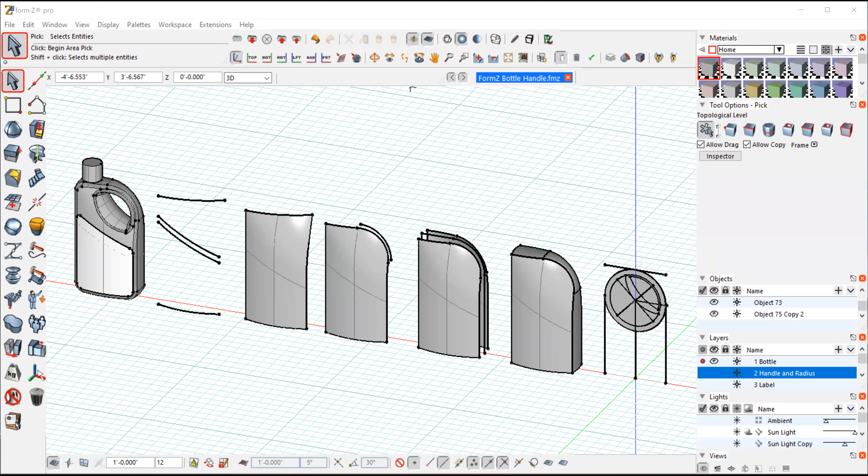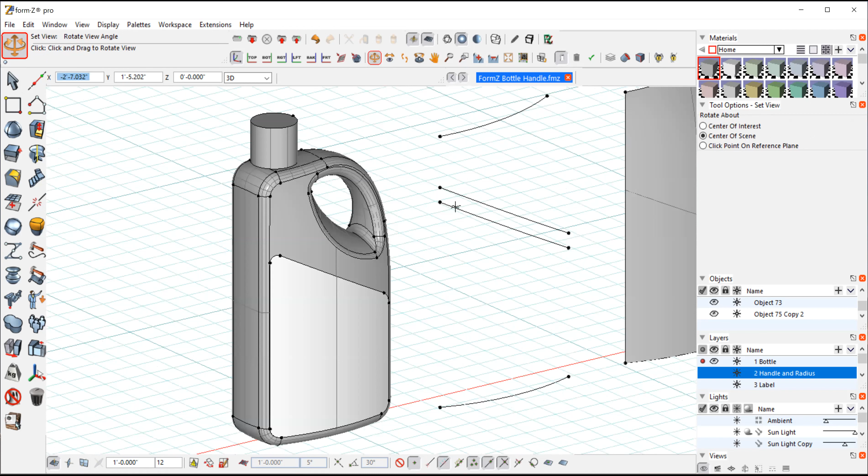It's pretty straightforward, I'm not doing anything unusual design-wise. Just has a radius corner, and we have the handle up at the top, sort of oriented on a 45 degree. Then the rest of the bottle is pretty straightforward. I have my nice soft edges so we can get out of the mold. I have a ruled surface that I'm integrating as I'm building this bottle, so there's the label area for that ruled surface. And I'm not doing anything with the closure, just putting something there as a placeholder.

Okay, so when doing something like this, where we're trying to design the bottle shape to accommodate the handle, we just need to keep track of certain things, like the thickness and the width of the handle, because I'm not going to build the handle separately and then add it to the bottle, I'm going to integrate it. So it's very critical that I start to think about the proportions and the size of that handle as I'm building this. So I'm starting off with lofting a surface, which will be the first step here.

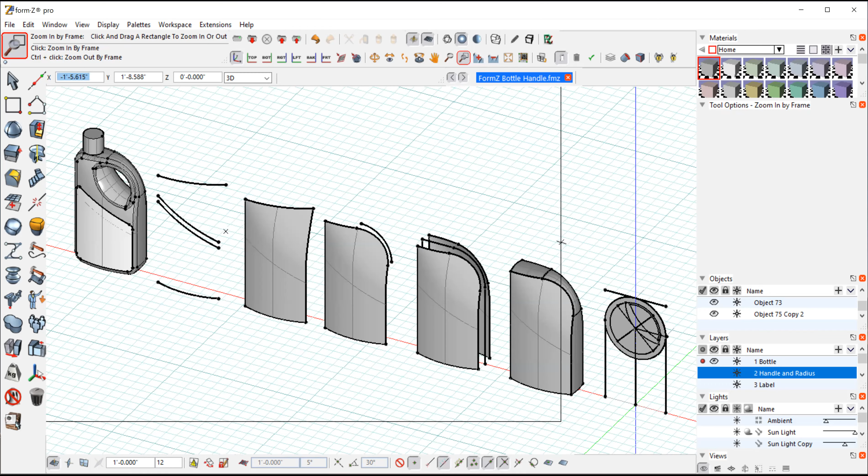Well, actually, I'm going to start off with doing my layout. Let's start with that. Just my construction lines. So right here, I have a width I'm picking, the face is going to be slightly less than 6 inches. I think I'm like 10 inches high, roughly 3 inches deep at its max.

So I'm starting to pick those dimensions, and I know I'm going to have this corner here, I'm going to radius that out. So I'm picking a radius that represents the total width of the bottle, and I'll just use that one corner to cut it out. And I'm starting to think about where my handle is going to sit.

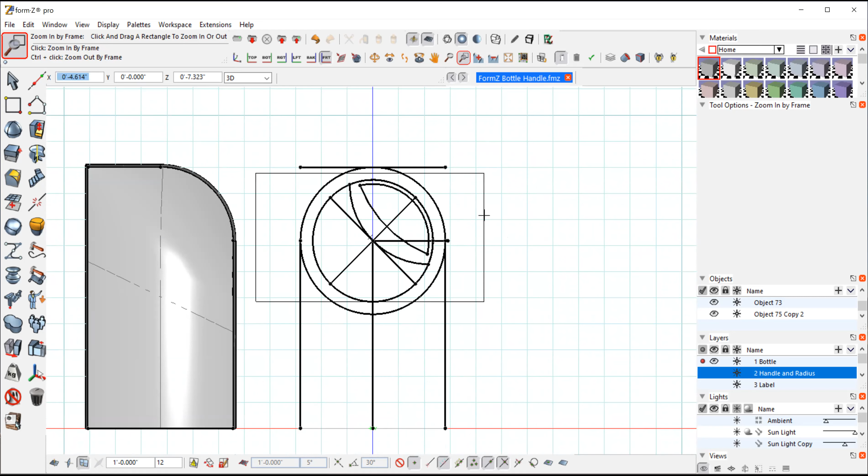This will be made in the next step, but I need to know where I'm going with this handle. So I'm picking some dimensions. Roughly, handles can be about 1 inch thick, 1 inch wide approximately, give or take, depending on where it's going to fit and how large it is. And then the clearance of the inside of the handle could be 3.5 to 4 inches. 4 inches is very generous.

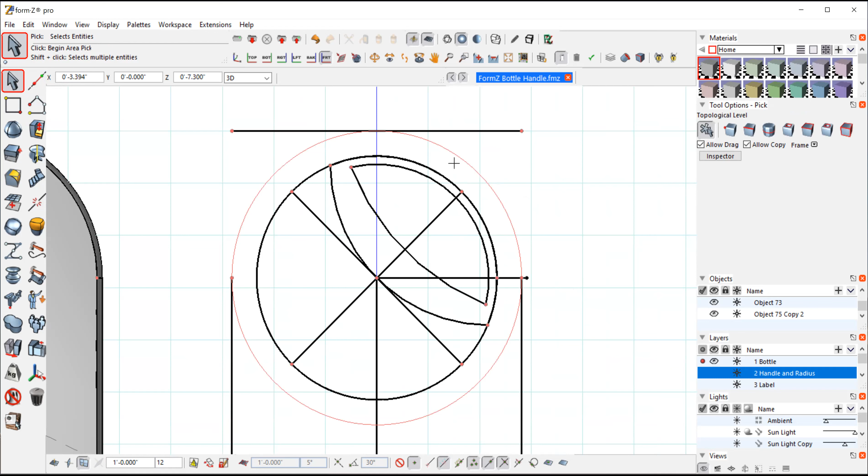So I'm starting to lay this out. This might change as I move along, but I'm getting ready to figure out where that's going to be. So I know that this top corner right up here on the top right needs to be thin enough so I can, when I push my handle through there, it'll work. So step one, so if we go back over here,

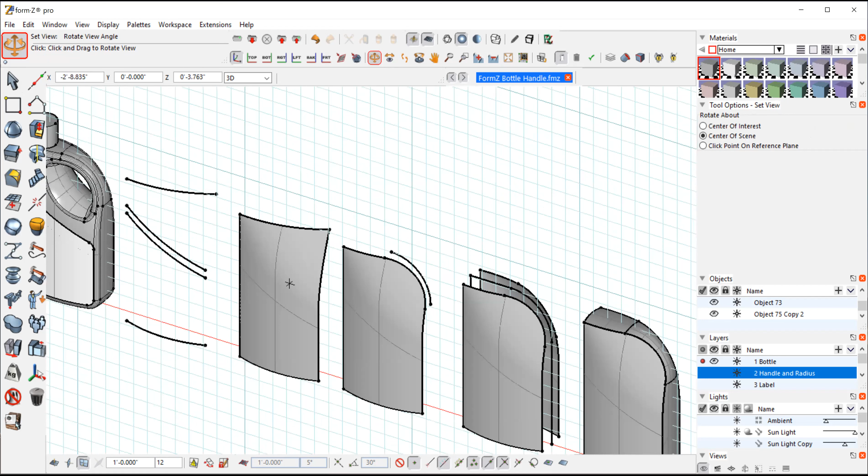I'm going to loft this front shape, and then all I really have to do is trim it and then mirror it to the other side, which is the sequence I have here. So talking about the lofting - again, this takes a little bit of time, a little bit of back and forth to get these dimensions right.

So here's my lofted shape. I went back and forth to try to get this top corner - you can see how it's blending way over to the side here, because I want to trim that and I want that to be thin enough to accommodate the handle.

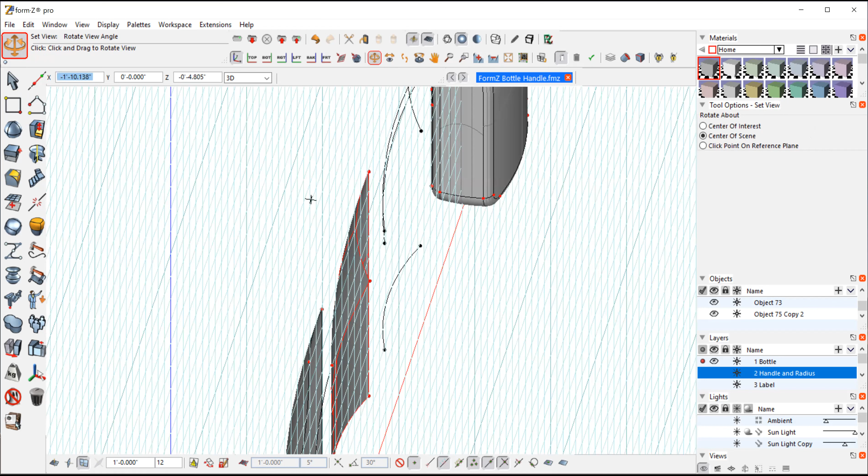So these are the sequence of curves that I came up with. I started off with this curve at the bottom that represents that front curve of the surface. And then I took it and moved it up to the top and moved it around. I angled it back, got this corner on the top right here, and pushed it way over. So it's very tight and close there because that's where the handle is going to be.

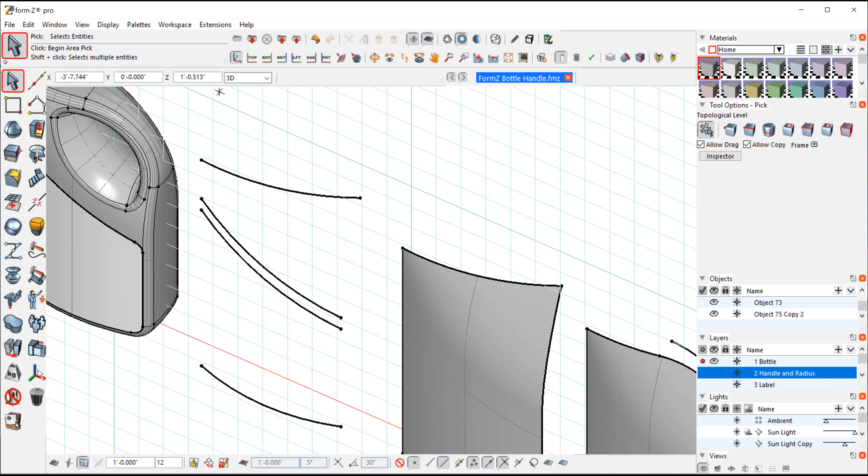And then I know I want a ruled surface in the bottom half of the bottle, so I just added these two sources here and they're on this angle. So my ruled surface will go higher on the left-hand side than the right side. Ruled surface is for my label. And the reason I have these two tight to one another is so when I loft that, my surface will come up straight to that point and then arc in gently.

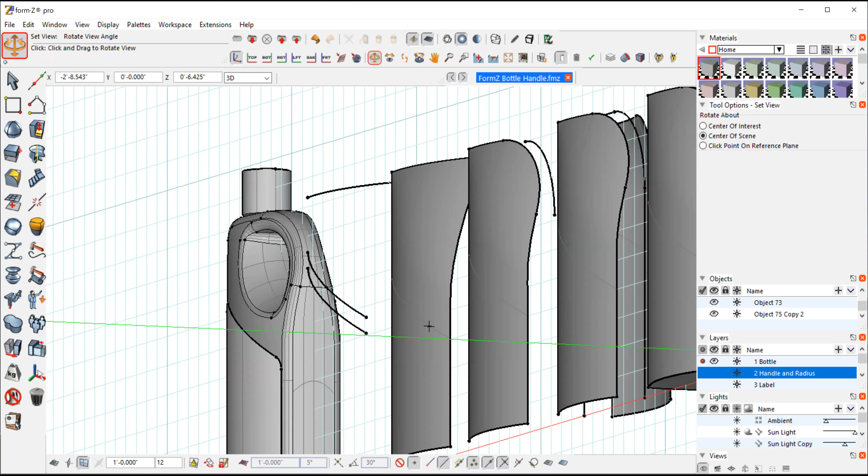I don't want an edge there, I want that to be a nice blend. So again, a little bit of trial and error to get that to work. So these sources, when we string these together, give us that nice front panel. Let's select these in order.

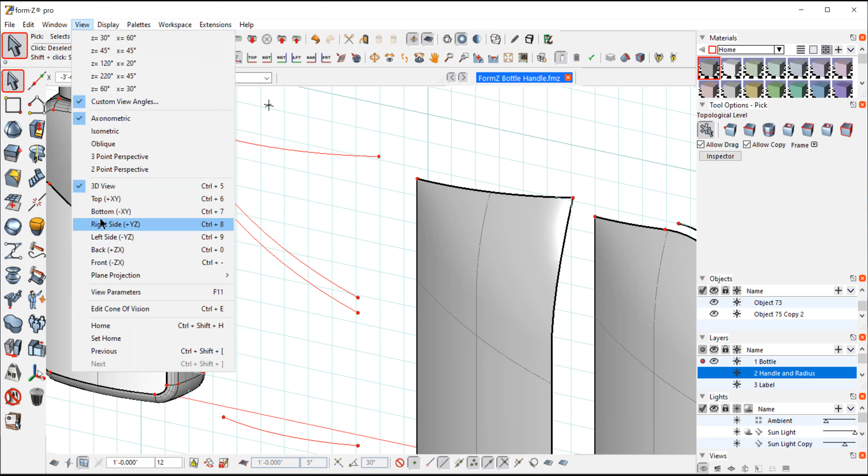And again, if we look at this from the front or top view, all of these points are on a plane. I want that all to line up perfectly. So I had to independently scale them a little bit. I don't want one shorter than the other because I'm going to trim this and I'm going to use the edge from this lofted surface as the edge of my bottle. I'm not trimming the entire part. So I need that to be accurate. So that takes a little time.

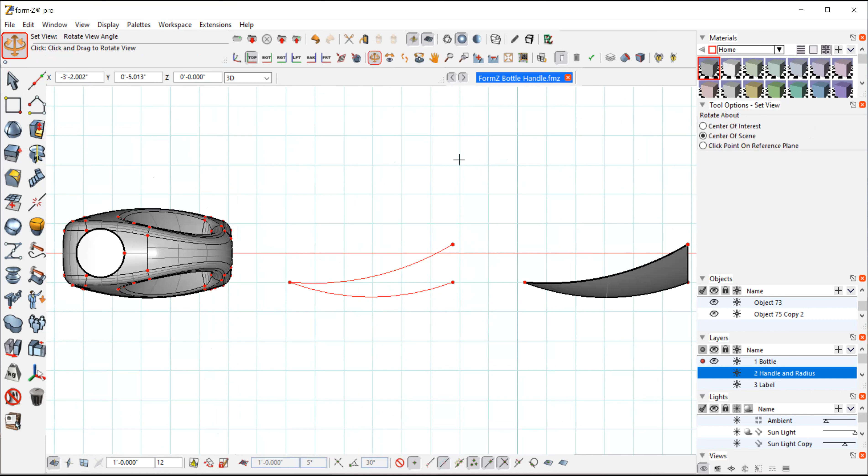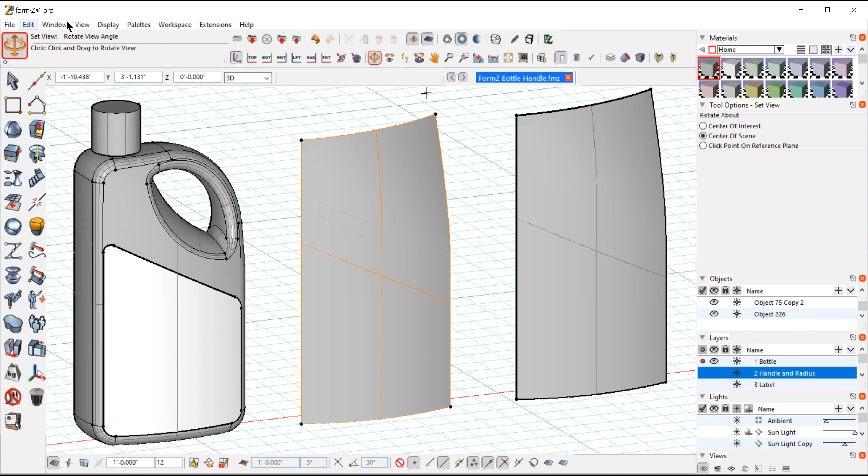So I selected those and I'm just going to go to my tangent loft. Don't need caps. Medium resolution is fine. So there is that shape. So I have this nice straight leading edge that's perfectly straight because my sources all line up. And then I have this curve back in this back corner. So from the front view, this is going to look like just a perfect rectangle. And there it is. That's perfectly straight up, nice and parallel.

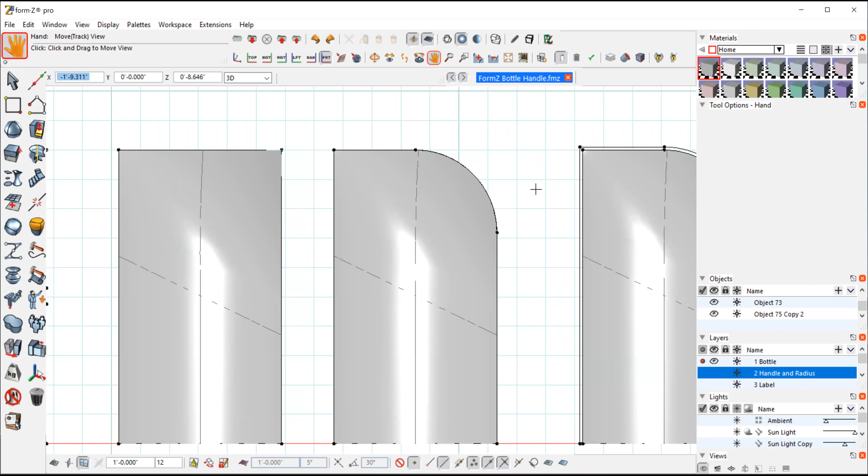So all I want to do with this is trim that corner. And I have that from my layout lines. So all I did was take this one line and just trim that because I have it perfectly lined up and everything is nice and square. So all I had to do is select the source and trim it with that line. And that gave me that nice radius corner there.

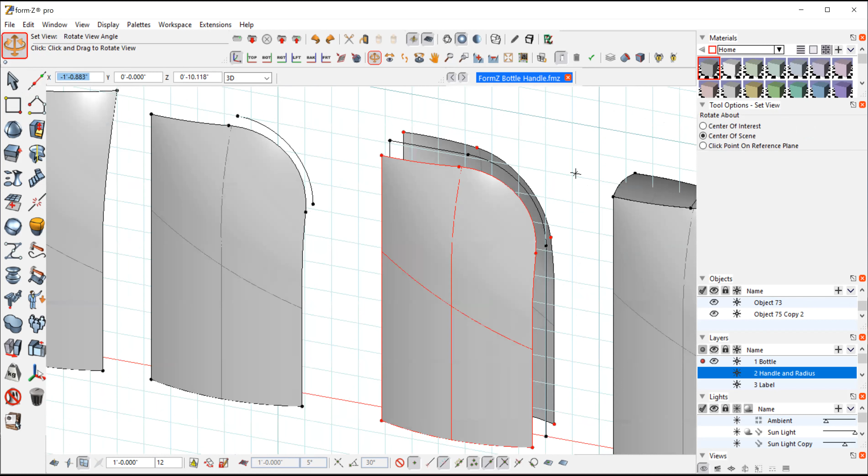So to test this out and make this work and build the rest of the bottle, I took this source and I just mirrored it to the other side. So now I have that exact same surface on the other side. Now I want all my draft angles and these subtle curves on the sides of this bottle and the top. So I went back to my layout lines and you can see I created these other lines here that are slightly outside. I think I probably only did about 1/8 of an inch or so.

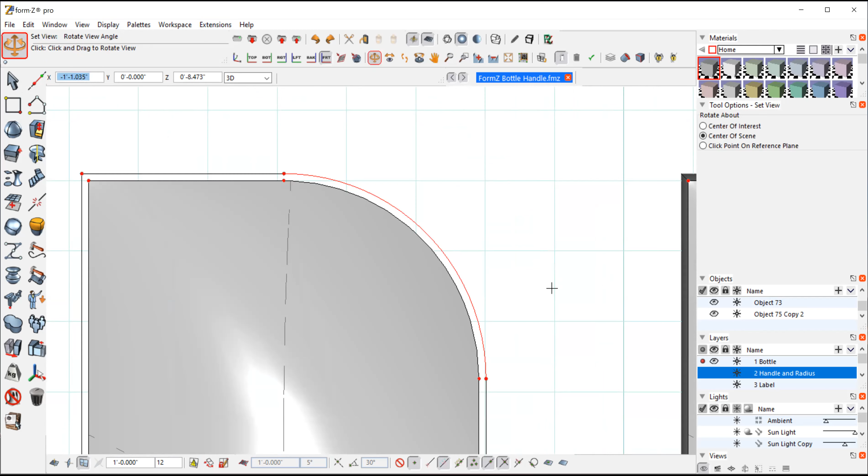This is going to be part of my lofting of all the sides because I do want this to have some draft angle. I don't want it to go straight back. I want to be able to get it out of the mold and I want a nice soft shape. Didn't go too soft. This is more of a mechanical solution. So again, once I have that made, I can now loft these lines. So if I select this, I'm going to lines now, not objects. If I did object, it'll select the whole thing. I just want this edge. So I'm going to do that by selecting lines.

So I selected this leading edge. I select the one in the middle and then the back leading edge. And then, sorry. Come on, you.

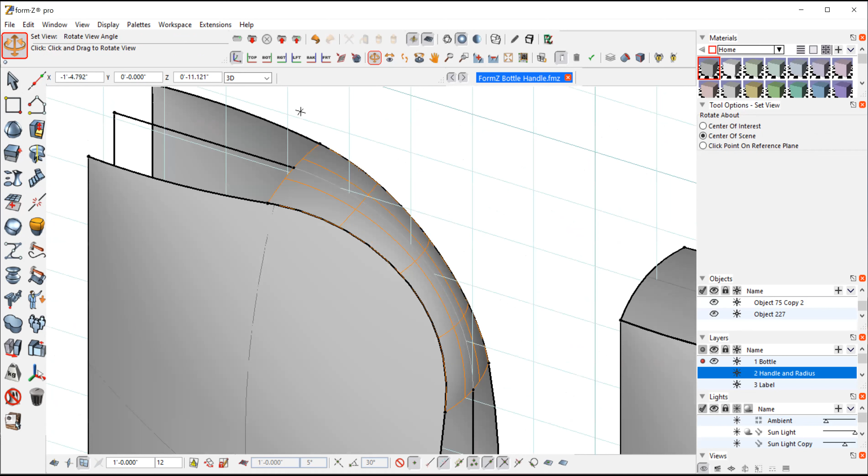Front edge, middle line, back edge. Again, using the loft tool, I can create these sides. So now that blends very nicely. You can see it's an arc. It's a subtle curve, which gives me my molding area. And the parting line would be right in the center. So all I did was do that all around the entire bottle. And that gives me all these surfaces.

Now the bottom is completely flat because we don't want any draft angle on there. So we're going to probably put a push-up or a punt in the bottom, so this will stand very nicely. So the bottom is perfectly flat. So all I did was select all these surfaces now, these lines that have been created. And I just moved them over and copied them and joined them all together and then put that back. So I have created that surface at the bottom. These are all separate surfaces.

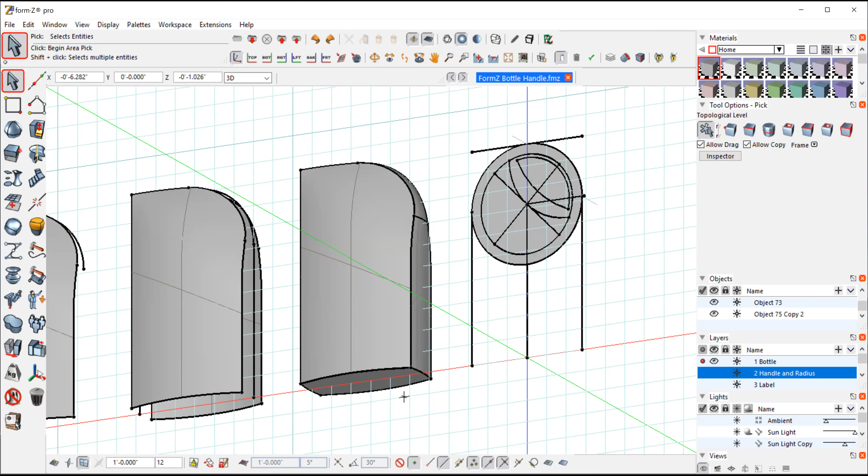So what I would do at this point is take all of this and you can union it together. Make sure you have a nice clean part and start experimenting with the radiuses. So that's putting together the bottle. So once I have this and I'm happy with some of these distances, now I need to check to make sure my handle is going to work.

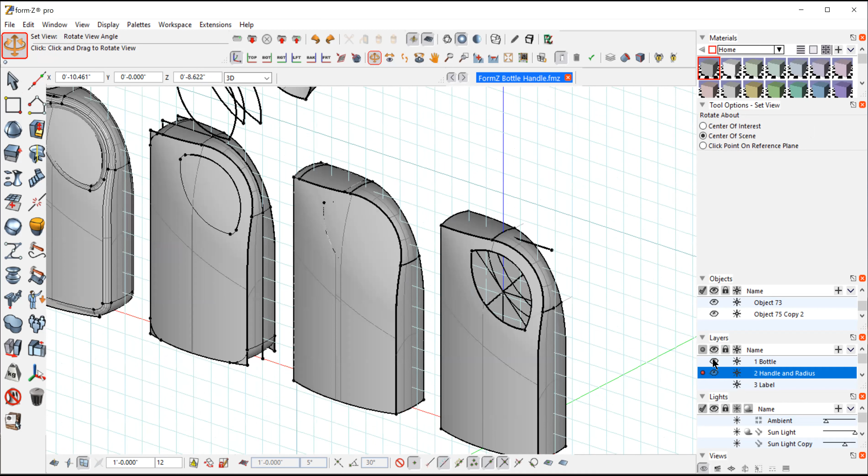So like I'd mentioned, I'm going to keep this all in one layer and I'm going to just bring forward the piece of geometry that I want to work with into this next phase, which will be creating the handle. So here in this right position, I have the front surface, and I took the back one away because I want to punch out this hole for my handle.

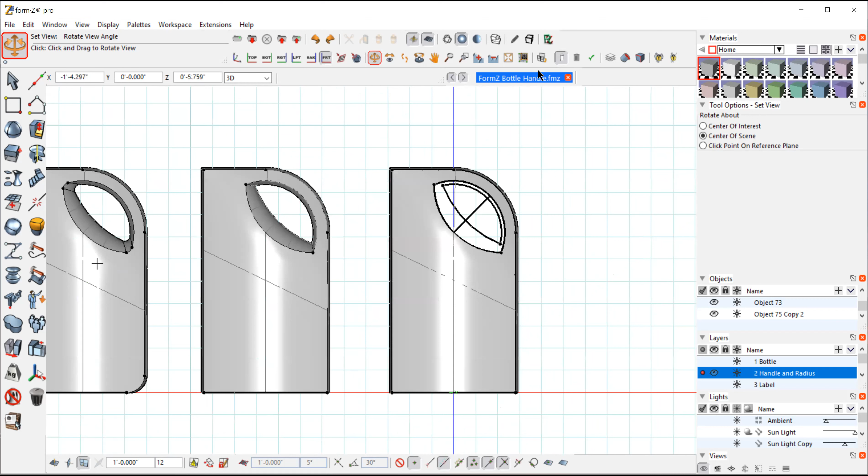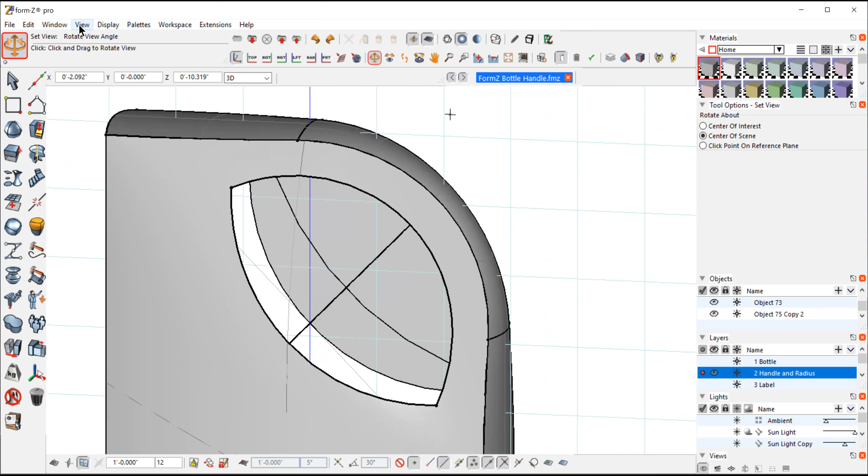So from the geometry I had created on that first level, I had built these two. This larger curve with this back curve, that's going to be the actual hole in the bottle that I'm going to cut through. So I have enough generous space there so I can radius that and it'll still fit. Again, that takes some guessing and estimations and a little bit of back and forth to get that correct.

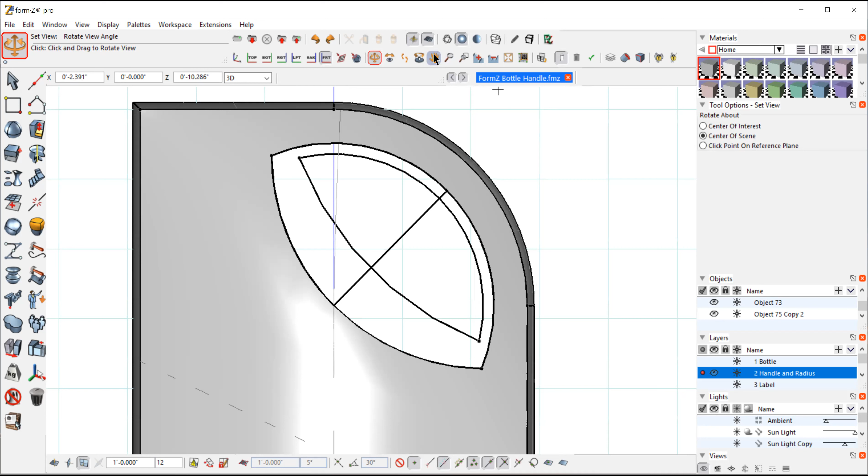And this other inside line, that's the line I'm going to use to loft. So now I'm lofting in the other direction so I can get this out of the mold, just like this back edge is going to get out of the mold. And you'll see what that looks like in a moment. So I took, I'm looking in the back here inside. So I took these bigger edges and I trimmed the bottle. It's hard to see, it's in there.

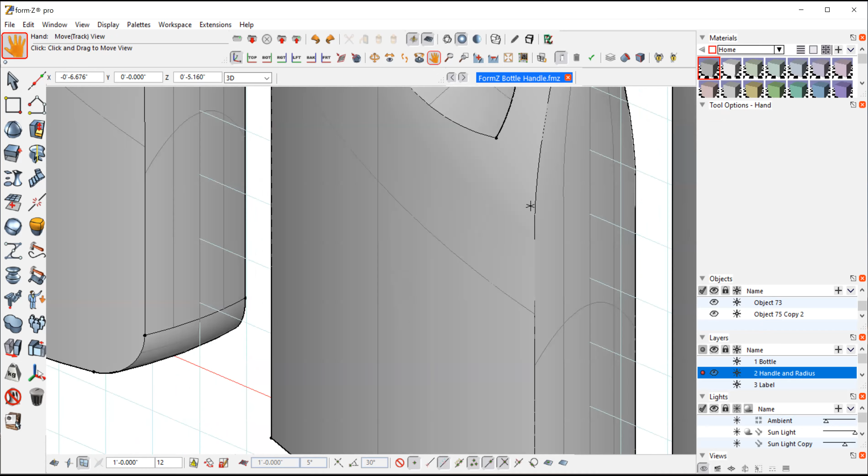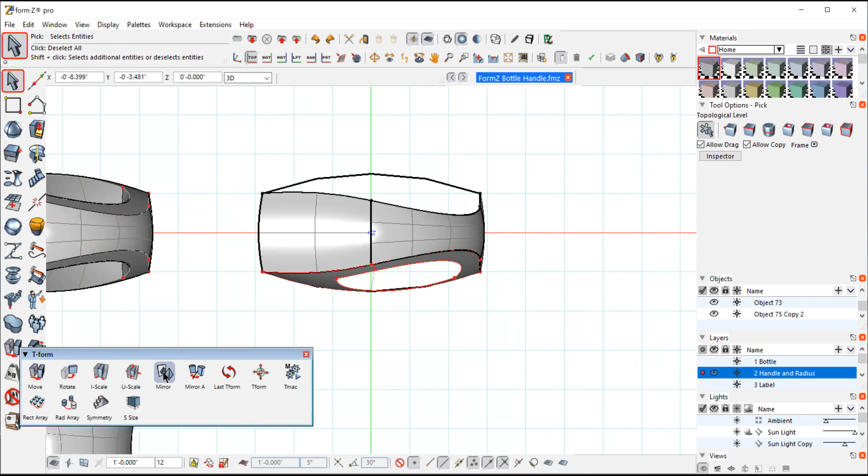I trimmed that hole. So now what happens is once I trim that, I need the lines on the other side. So if you select that surface that's been trimmed, let's see, mirror, go to lines. So I have that surface in the front. I'm just going to mirror it to the back. So now I have the front lines for the handle, and I have the back lines, and I have that center shape that I'm going to loft to. So I have that off to the side here so we can see what those parts look like.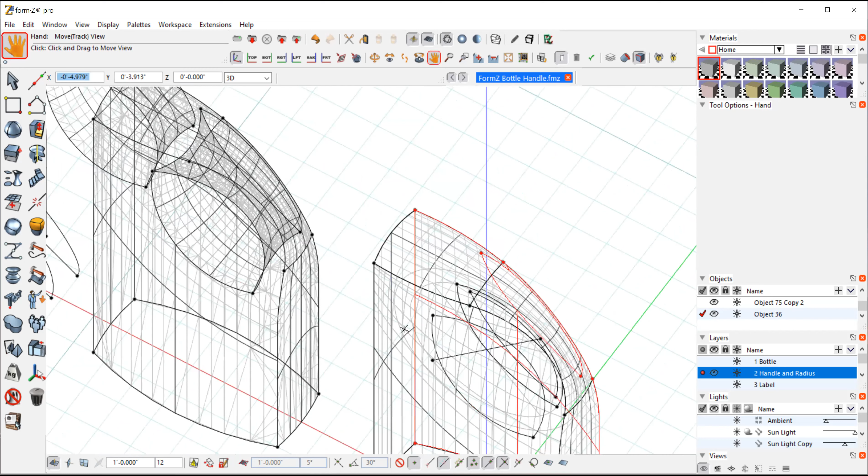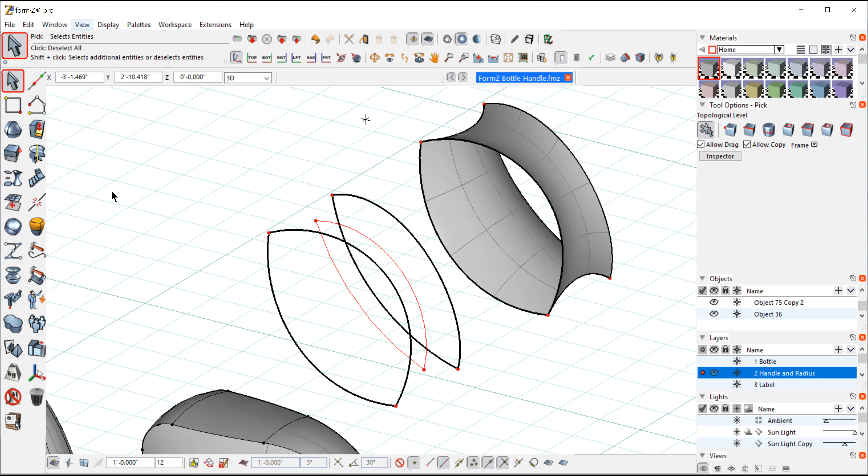Normally, I might just do this right on the bottle, but I pulled this aside so we can see this geometry. So what I'm selecting right now, that's the cutout opening from the front surface. And over here, that's the cutout opening from the back surface. And then I have these lines in the center, which are flat, and I'm going to loft to that. So we'll look at that from the top view. So here on the bottom is the lines from the front, and those are the lines from the back. And in the center, it's completely straight.

So just like when we lofted the side of the bottle, we're going to do the exact same activity, and we're going to get a shape like this. So these are connected. So let's go to lines. Let's take these three in the back. So if I select this one, the center one, and then the one from the other side, and again, it's lofting. So now I've created that surface.

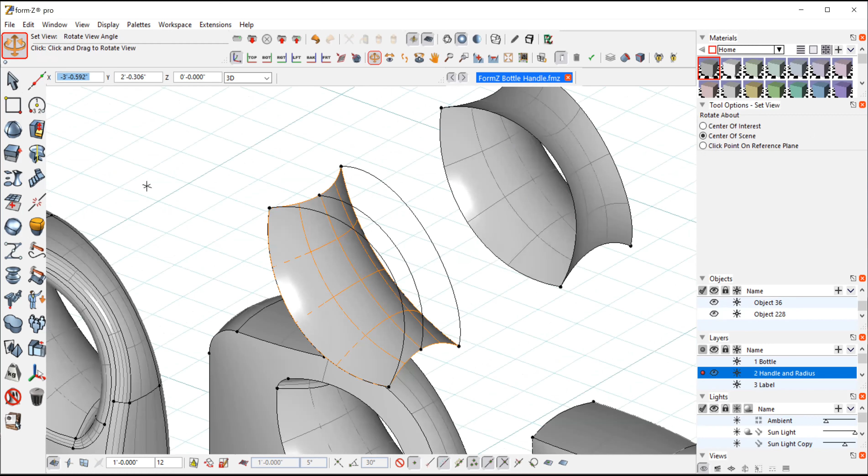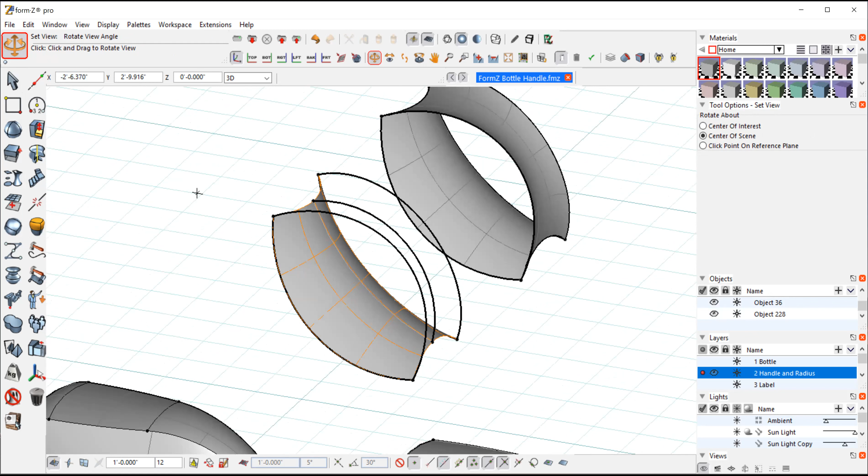And it has a nice, generous amount of curve. I did that so when you get your hand in there, your knuckles aren't in the way. And aesthetically, it just looks much more inviting, with a pretty drastic curve there. Not a minimal curve like I did the side of the bottle, because in here, this is where the hand needs to fit. And then I would do the same thing with these three to create these shapes. And then I bring them back into the bottle. And then we have all of these surfaces.

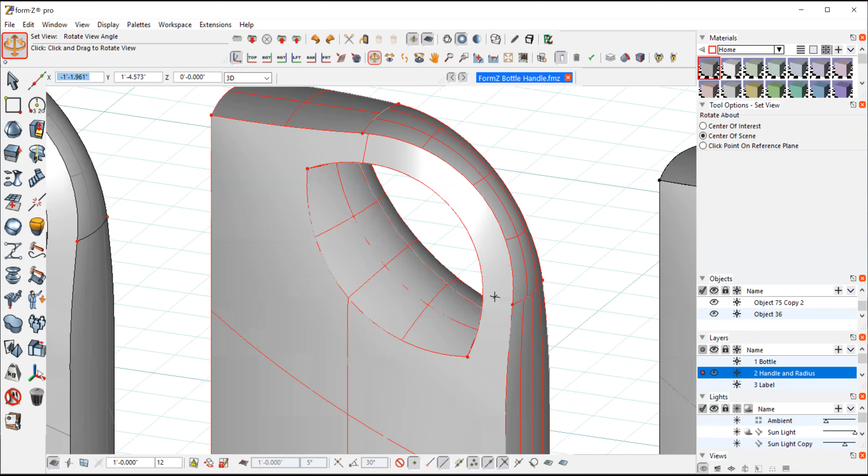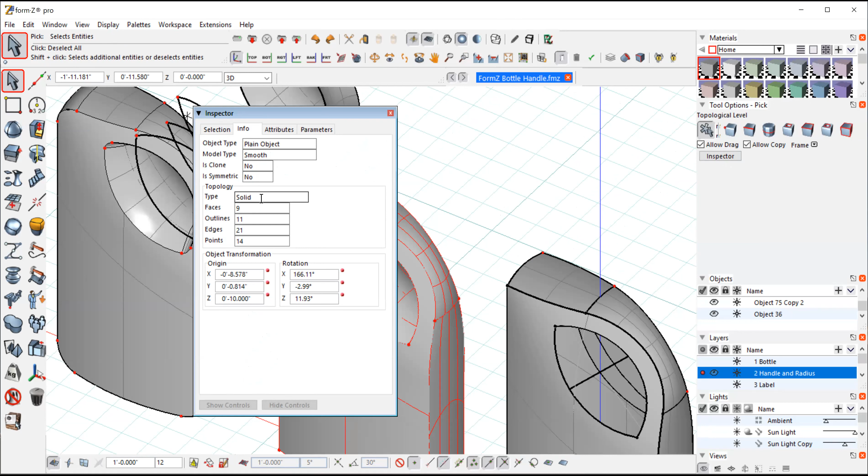Let's make sure. Okay, this I've joined. So I put those surfaces that I just created back in the bottle, and then stitch the whole thing together. And then, of course, after I'm done with that, you go into your selection tool. You can go to Inspector, and under Info, it says Solid. Always check that, because sometimes I've stitched things and it's not quite a solid. There's a problem. So that's a nice solid, so I know I'm in pretty good shape.

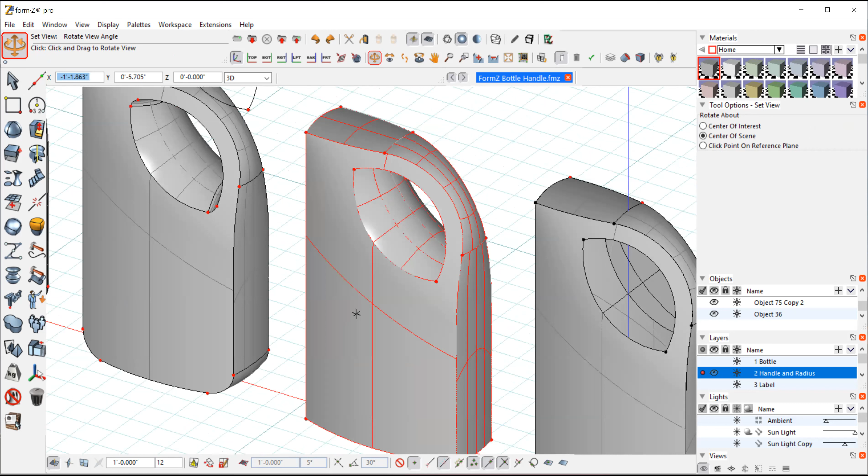So the next exercise is to start radiusing these details. Now, again, radiusing solutions can vary. I wouldn't just click on the entire bottle and radius everything 1/4 inch, because I might want to control some of the radiuses in different ways. So you can radius things in a different order. So we'll just talk about that a little bit for this bottle. So you can see here I started radiusing. I wanted a nice generous corner on all of these outside edges.

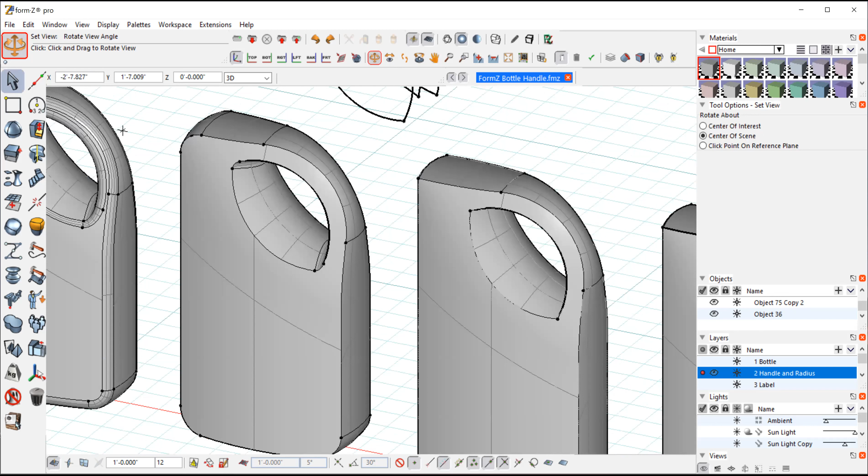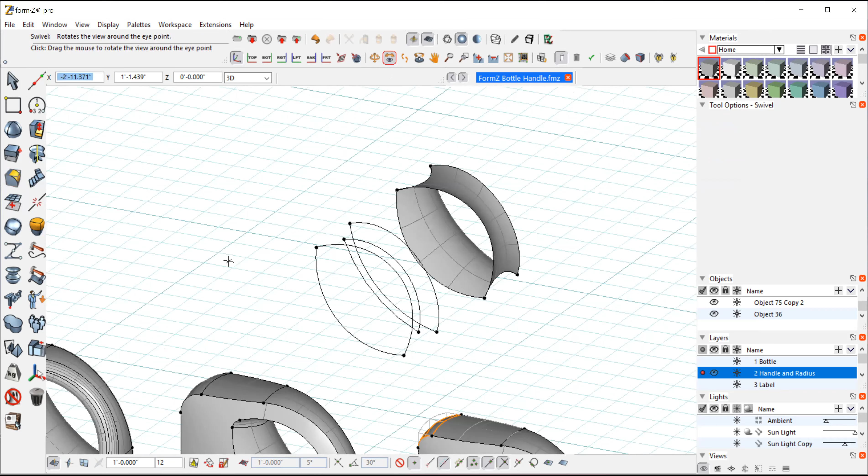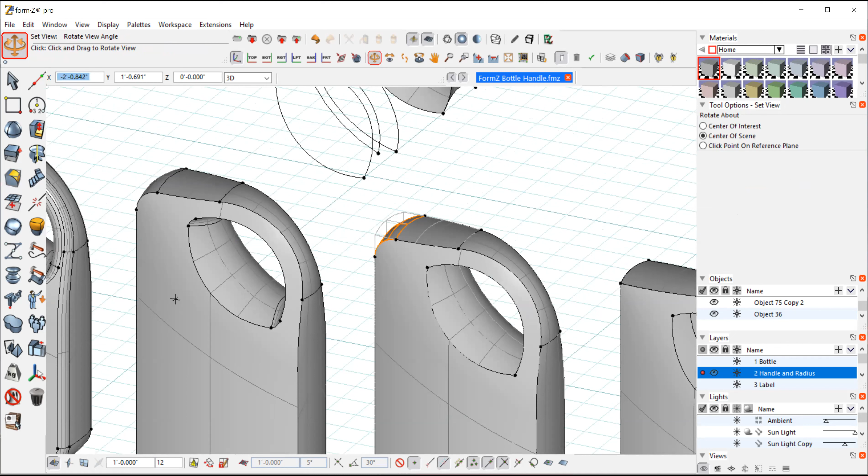So I did those probably an inch, maybe 3/4 or even half. It's hard to say. Let's test one here. So all we have to do is select that and go to round. Probably a half. Let's see. Yeah, that looks about, oh, it's a little shy. I probably did 3/4. I could have made that adjustment while it was still selected. Yeah, so that was 3/4 of an inch on that outside edge. So it looks about right.

Okay, so I did that on all the outside edges, and you can see I also did the inside of this handle. I wanted to start to do that because once I do that, I can then select this entire sequence and do that at a different radius. I wanted that inside one to be a little bit larger.

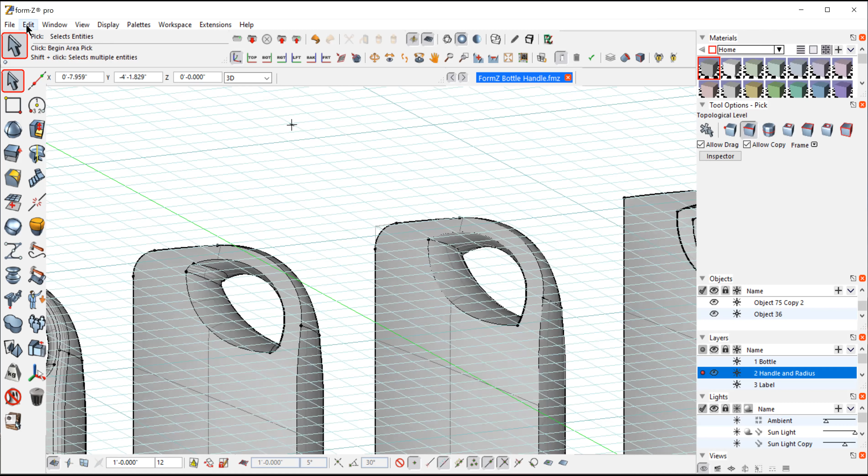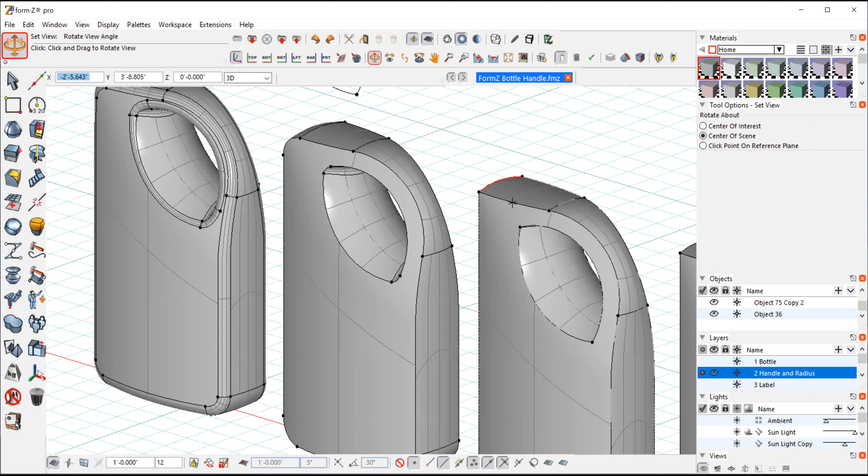So I did the outside corners. Obviously I got the radius by the handle, and I'm looking at my handle, and it's looking pretty good. It's a pretty good size. I'm going to do some radiusing here, as you can see off to the left, and those radiuses will actually give me more clearance. So that's a little bit of a guess when I'm building. So I have these radiuses in here pretty tight.

So let's select this line sequence, which is that whole sequence there, since I put a radius in there, and I can now select that. Looks like I probably did around 1/4 of an inch. Yeah, that looks about right. So that's coming up. See how large it is inside? Because that was a sharper corner in here.

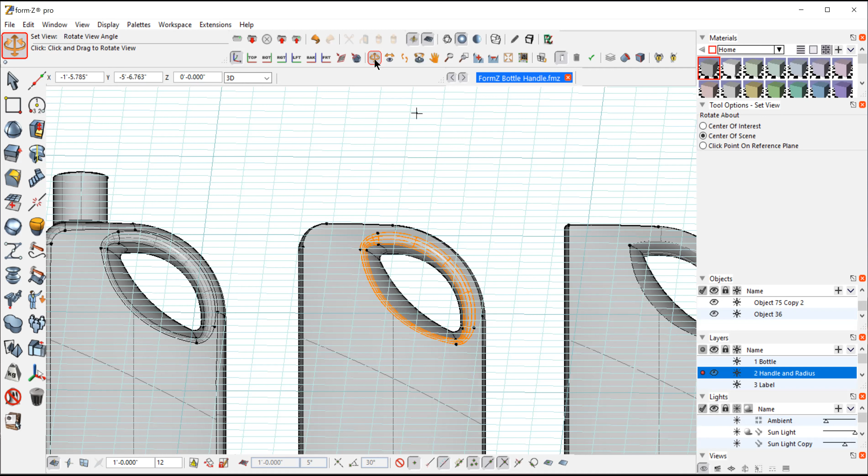So it's fitting that. So it's going large, even though it's all 1/4 inch, it's larger on the inside and then getting smaller out here because the surfaces, when they come together, are creating different angles. And sometimes the program will have trouble figuring that out, but that worked out really well. So that reduces some of that material in there and makes that handle a bit more grippable. So that worked out really well. And obviously, I would do that on both sides.

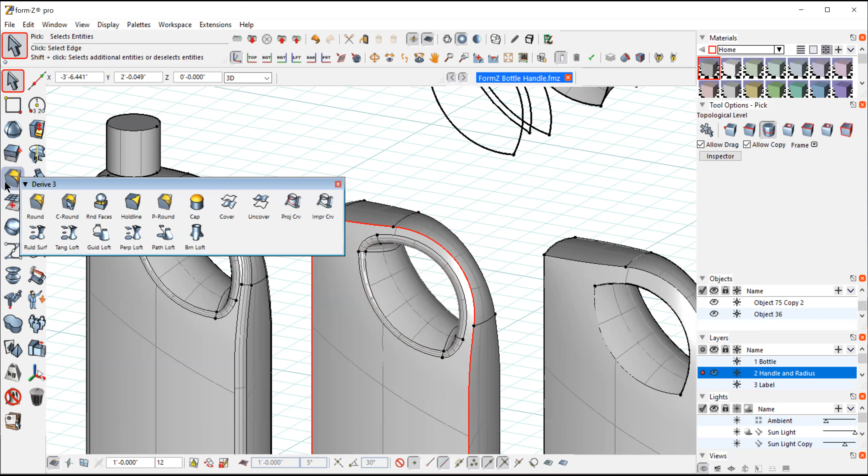And this outside sequence, let's see how I did this outside part. Since I have the radiuses in the corners, I can select that as one sequence. That actually looks a little bigger. Let's see what 1/4 inch looks like. Yeah, it went a little bigger. Let's try 3/8. Yeah, that looks about right. And I just made it.

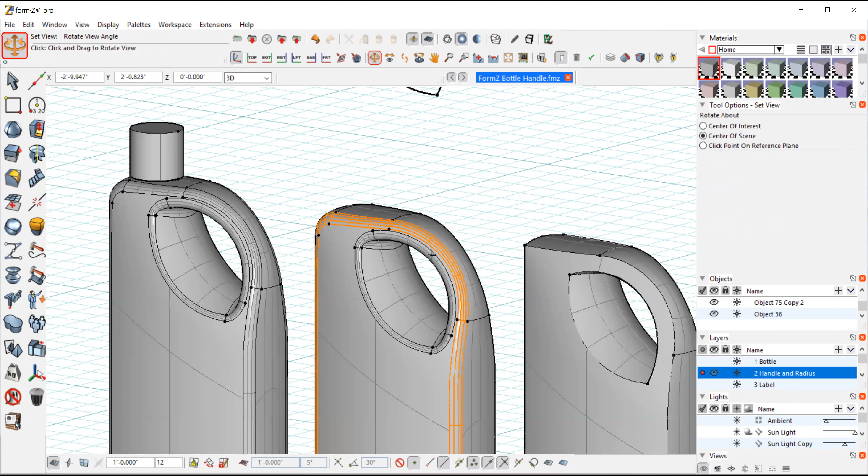Quite often, it won't go over another radius because the solution might not give us good clean geometry. So you can see those radiuses are really, really close here. And I have just a little bit of surface left. But this is quite nice. So this handle will be very, very soft. There won't be any hard edges. It'll be very round because of all this lofting that we've done. And it looks nice. It's quite strong.

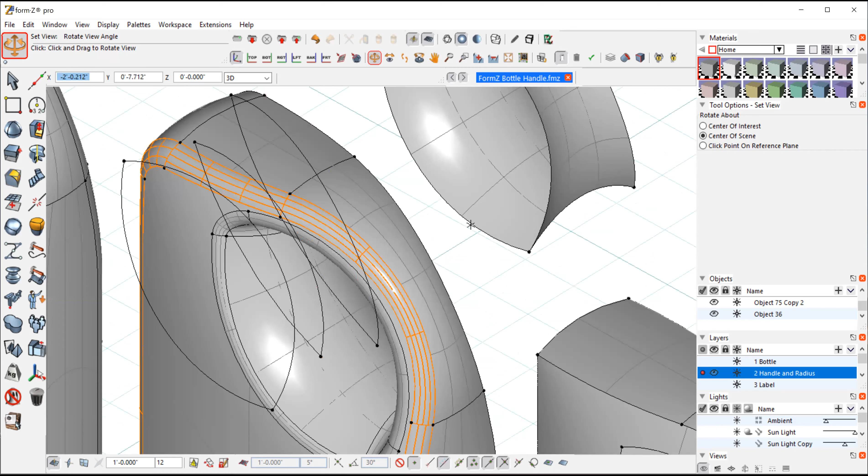Yes, it is getting a little wider at the top and at the back, but it'll be a nice strong handle. Some handles are just a little too thin and you don't really feel like you have a good handle on it. So that's how all the radiusing worked.

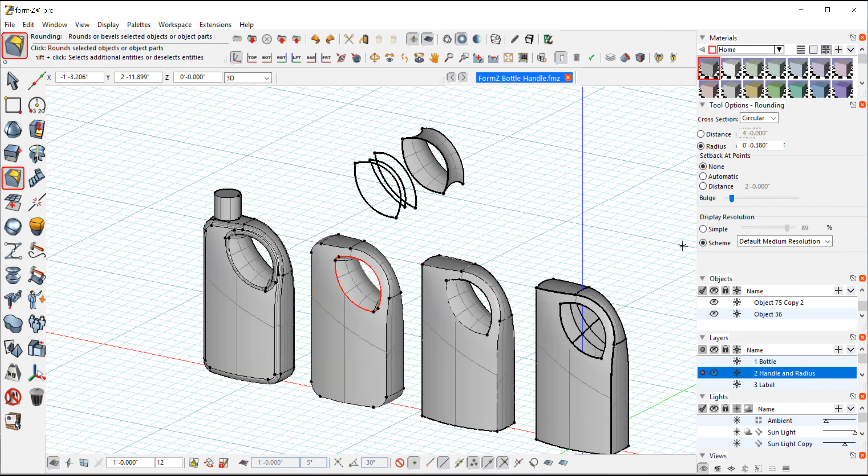And then the final part was the label. And again, this was planned. So I knew I had this ruled surface. So over here on the right, you can see that label area. So like I had done before, I selected that front surface, which is over here. And you can see that little tiny piece of material that was around the handle that came with it. But I don't want that whole top part because that's a compound curve up there. I can only do my label down here at the bottom.

So all I did was take this line, put it on an angle, the angle I wanted. I don't know exactly what it was, and trimmed that part. So then I have this piece here after I trimmed it, and I have radiuses at the bottom because that came from the bottom corner of the bottle. I have not created the tolerances.

Like I had mentioned before, the labels, we need a little bit of space around a label, so the label equipment has room. I'm not going to do that this time. The main thing was to show the handle here. So I'm leaving this full size. It's a little bit too big and it'll go right up to the radiuses of the bottle. It'll look very nice. Production-wise could be a problem. So by trimming that, I get this label area on the left.

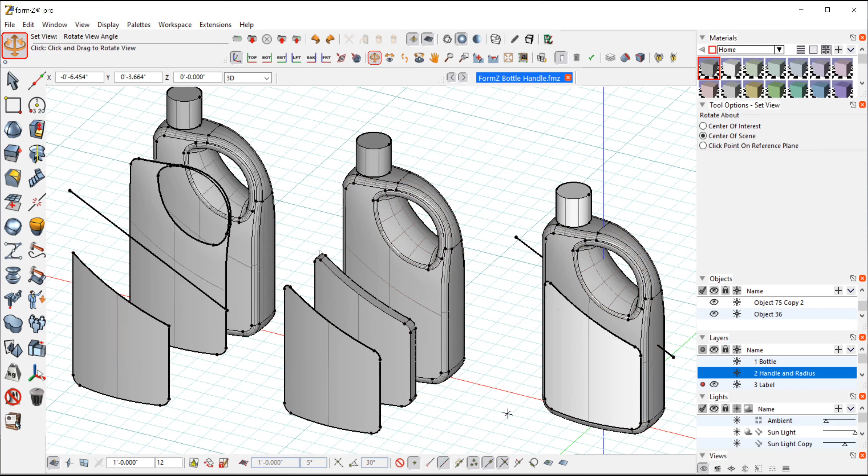So as I had mentioned before, we need to radius those corners. So what I did was I created an extrusion out of that label. So then I had a solid and I could select those two corners and I could use my rounding tool instead of the fillet tool. And then once I created that radius I liked, I just selected the surface and I have my label area. So all I had to do is put that in position in front of the bottle, and this is done. And there it is. And I have a nice ruled surface.

So that's just how to cut a handle into a bottle and integrate it into the shape. So again, this bottle is approximately a little over 2 liters. So it's relatively heavy. It's not huge, but it could deserve a handle. So that's it for this bottle. I will do another much larger bottle, probably around 5 liters or so, and show a different way to create a handle.